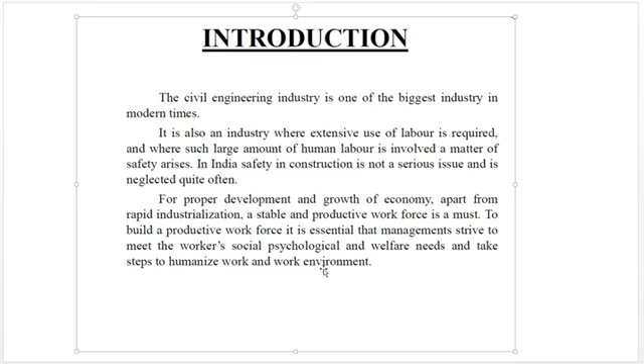So first we see what is safety. Safety is a difficult term to define due to the interrelatedness of several factors. Very often safety is judged in terms of an inverse relationship with the accident rate. Higher the rate means lower the safety, and vice versa. Theoretically, safety would mean the absence of danger at work, made possible by eliminating the hazards that create the danger. A more practical way of defining it is that a thing is provisionally categorized as safe if its risks are deemed known and, in light of knowledge, judged to be acceptable.

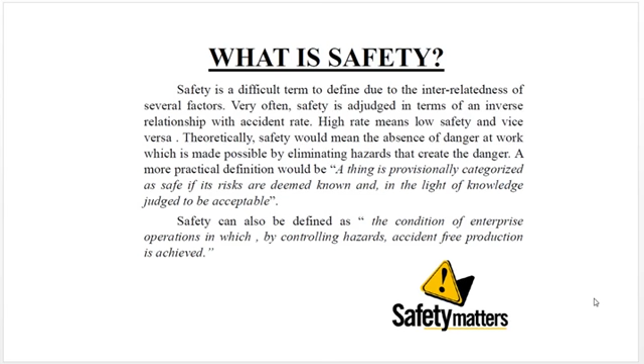Safety can also be defined as a condition of enterprise operations in which, by controlling the hazards, accident-free production is achieved. So here, safety of all the persons or workers is categorized as inversely proportional to accident rates. As we know, there are many accidents happening or likely to happen in the construction industry. If we create a hazard-free construction, we have to take proper care about safety equipment and the safety of all the persons or workers.

So why does the issue of safety arise? Due to frequent accidents, there is a loss of labor, because laborers are working in the construction industry. If any accidents happen, what will occur? It may cause, if it is a severe damage or severe accident, the life of a person can be lost, or something very serious can happen, or in some cases minor accidents can occur.

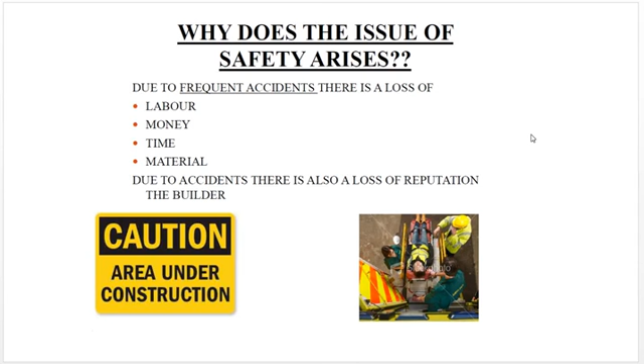So in that case, what will happen? It will be a loss for the construction industry - loss of labor, loss of money, loss of time, loss of material, and including loss of reputation of the builder. If proper safety is not provided, it will affect the reputation of the builder also, because no labor is going to work under this builder if they are not going to give proper safety for the labor. That's why safety is required in the construction industry.

Accidents are readily recognized when there is damage to properties and someone is injured. Generally, an accident is defined as an event which is unexpected or the cause of which is unforeseen. So here accident is not only for properties. If anything happens to persons or any injuries occur, then also we consider it as an accident.

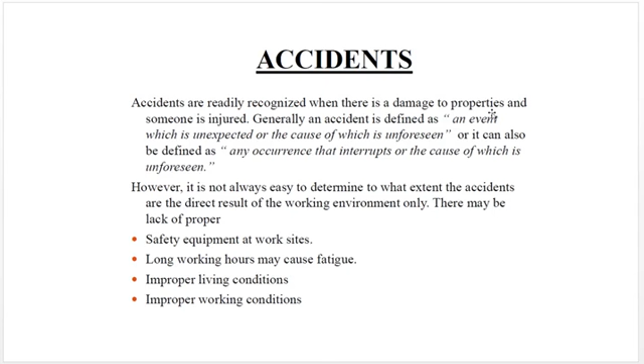So how does this accident happen? Because of lack of proper equipment, long working hours, continuously working the person for more than a certain time - in that case accidents will happen, along with improper living conditions and improper working conditions. These are the main causes for accidents.

It is for this reason that very often safety, occupational health, working condition and welfare are bracketed together for evolving measures for accident control as well as for promoting safety. It may be underlined that in construction, the concern of safety is for both the person and for the property of the structures. So safety is required for both.

Next is causes of accidents. There are many causes which lead to accidents. Mainly human causes, faulty working methods, and structural failure - these are the main causes which happen at the construction site.

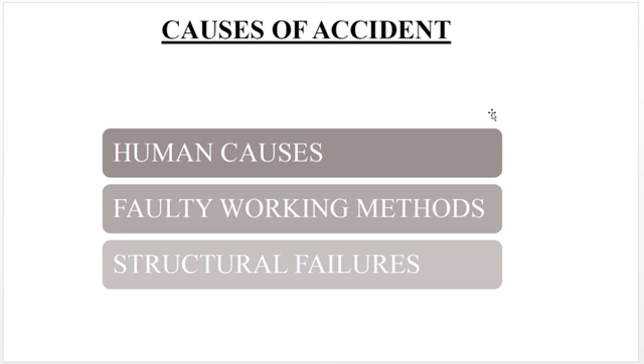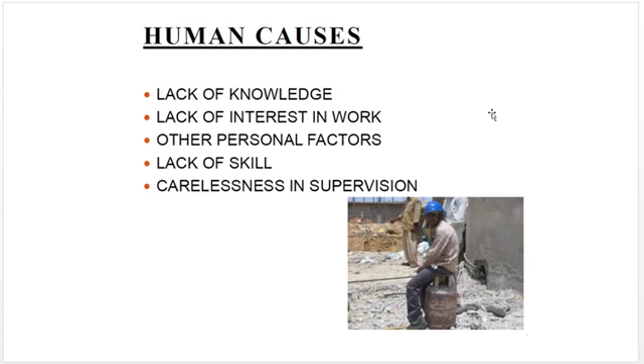When I say human causes, this includes lack of knowledge of the person working at the construction site, lack of interest of the person, other personal factors, lack of skills, lack of safety equipment, carelessness in supervision, and the person not using safety equipment properly in the construction work. These are all the human causes affecting accidents at construction sites.

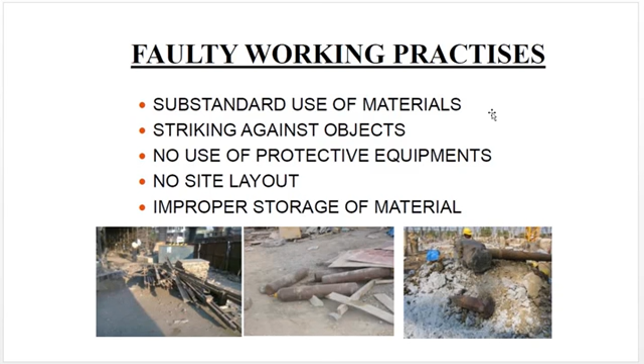When I say faulty working practice, this means substandard use of material - not proper materials used for construction work - or striking against objects, no use of protective equipment at the construction site, no proper site layout, and improper storage of material. These are the faulty working practices present in construction sites.

And in some cases structural failure also happens due to improper design, due to faulty materials they are using, and due to climatic conditions. There are many ways. Sometimes we can see structural failure when they are constructing.

And recently one example of a building in Dharwad city also collapsed. So in that case also, the life of the person or the life of the labor is lost. So when we are going for design or going for construction, we have to take care of safety and proper design - everything we have to take care of.

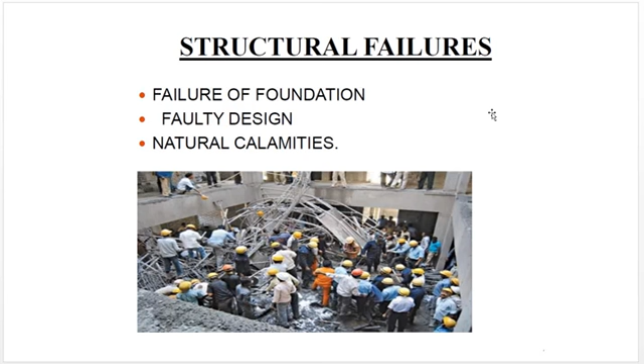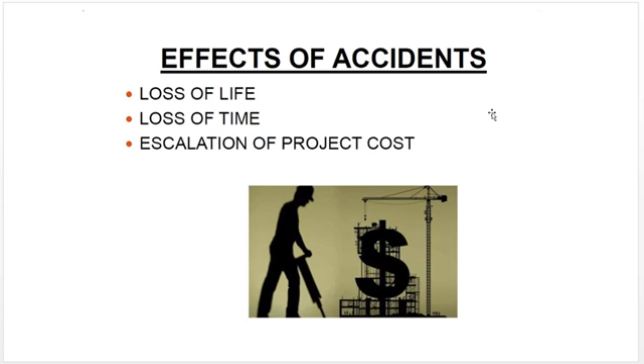Next, effects of accidents. If any accidents happen - loss of life if major accidents are there - and loss of time for the construction industries, and especially an increase of project cost, because a contractor has to bear all the losses which happen at the construction site. He has to look after all the laborers, he has to take all the phases of the accidents, and so including all this, it will be affecting the cost of the project, right?

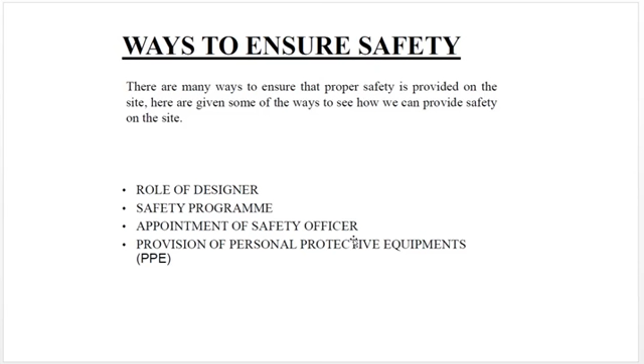Next, ways to ensure safety. There are many ways to ensure that proper safety is provided on site. Here I have listed some of them: role of the designer, safety programs, appointing safety officers, and provision of proper personal protective equipment. These are some of the safety measures we can take.

So, role of the designer - what he will do in the development of the project. A significant role is played initially by the designer of the project and then by the contractor.

Construction worker safety has often been regarded the sole responsibility of the contractor, because the contractor is only going to provide all the safety equipment for the construction, not the designer of the project. Despite the obvious reasons for placing the primary responsibility on the contractor, the safety performance on the project may well be dictated to a large extent by decisions made by the designer.

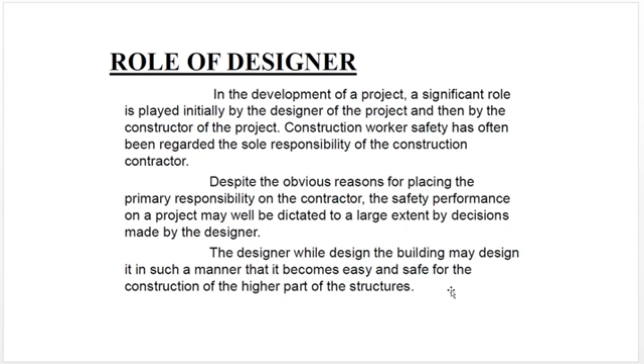The designer, while designing the building or structure, has to take care in such a manner that it becomes easy and safe to construct the higher parts of the structure, because we are not always constructing smaller buildings. Nowadays we go for high-rise structures, up to 100 floors, 60 floors, 70 floors. When laborers are working on the top floor, wind is blowing at a higher speed, so the designer has to take care properly of all these aspects and give the proper design for such types of structures.

Next, safety program. Most of the accidents that take place are mostly due to the lack of knowledge and skills of the workers and the supervisors. It can be improved by holding safety training camps for whole site staff and workers, with specially trained persons hired to give the safety programs or safety camps. Whenever recruiting a new worker, their experience should be checked and adequate knowledge for the required work has to be verified. Keep a record of the accidents that took place on the construction site. So the safety program is a major program.

You can go to any construction company, and they will give you the safety program first, and continuously they keep giving safety camps for the site works, the site construction works, or the laborers. They continuously give these, and many of the bigger companies invest a lot of money in the safety program itself, because they don't want to lose the labor and they don't want to face any hazards happening on the site. So a safety program is essential in construction.

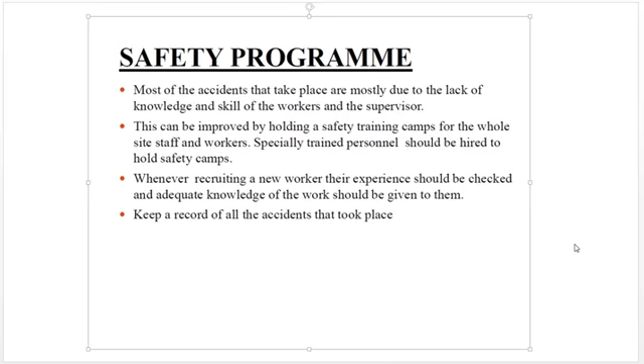Next is safety officers. If you go to the bigger companies, along with the site engineer, you will find a safety officer. He should be specially appointed to take care of all the safety related issues of the construction site, and appointing such an officer helps the health and safety of the staff in the area or in the construction site.

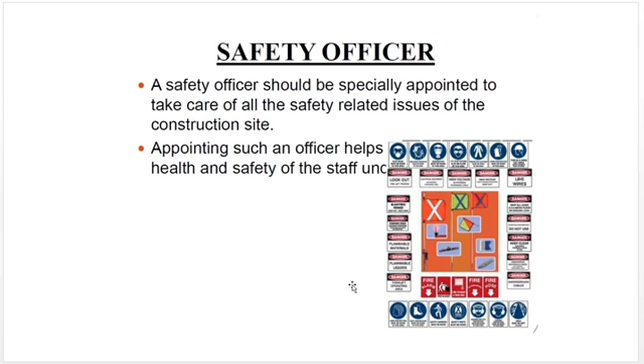Next is personal protective equipment, which we also call PPE. Personal protective equipment is the most basic front of protection and safety for the workers. There are various personal protective equipments, and according to the type of work, they will be distributed. So very common for civil engineering, they can go with the helmets.

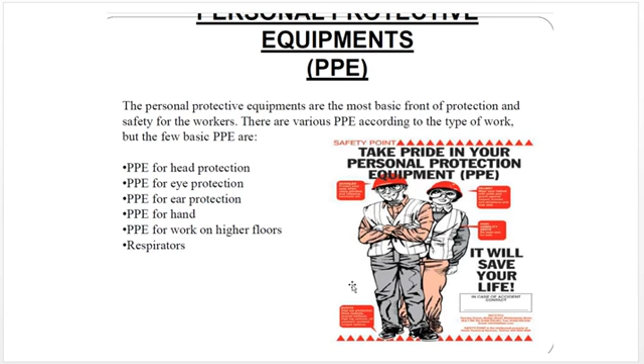They have to wear eye protecting goggles, ear protecting headphones and gloves, shoes they have to wear, and if they are going for higher work, they have to go with hooks and tie with ropes, and respiratory equipment. There are so many equipments available for the construction industry.

In the construction industry, helmets are provided with different colors, which indicate the different classes of the workers, along with life jackets and suits. So you can find a number of equipments which are available or which are provided on the construction site when they are working.

When workers are working in higher elevated areas, they go with hooks and ropes for construction safety. So this is the importance of safety in the construction site, because it is a very difficult task we are undertaking. Bigger constructions are happening on site. Okay, thank you.